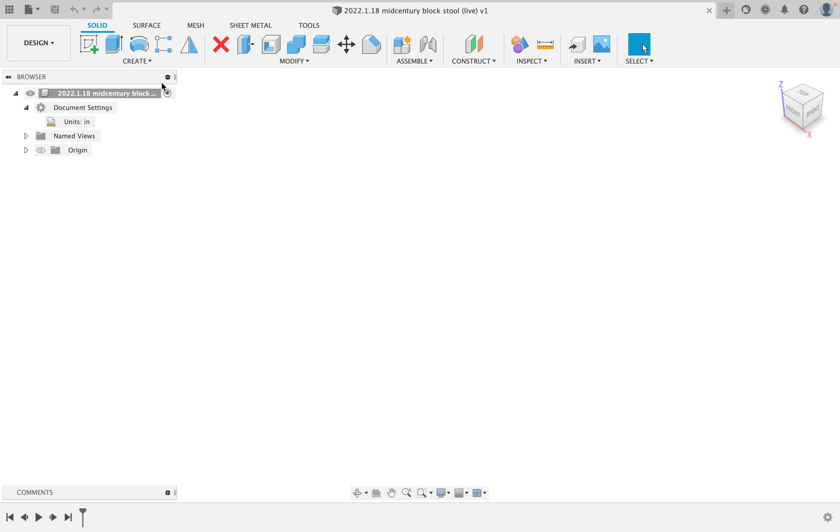Now we're going to click on this button here for Create New Sketch, and I'm going to create that sketch looking forward at the object, because in the case of this stool, it makes more sense to do it that way.

Now I'm going to create a line down through the middle, because that is going to be our mirror line. I will click on it and hit X to make it a guide, and click on this button to make it coincident with the origin. That means it will now turn black, so it knows that it is right there in the middle and I can't drag it over.

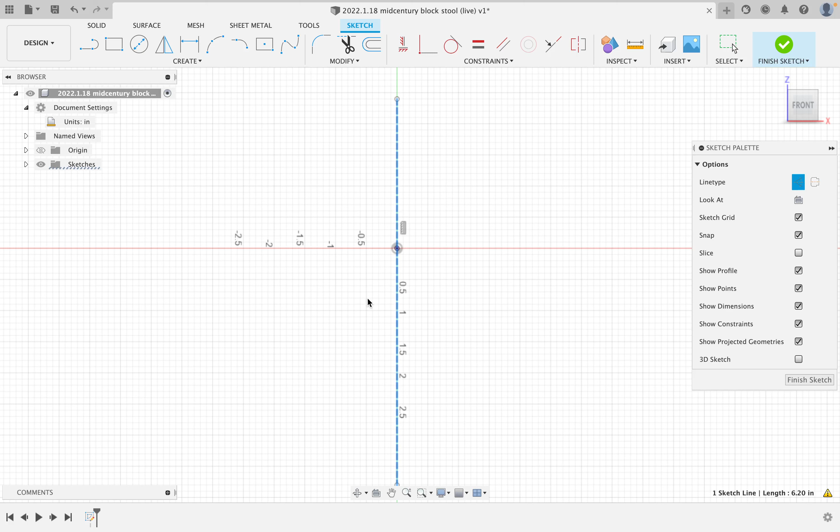I can drag it up and down. It doesn't really matter if we drag it up and down. Okay, so now if I create a center point rectangle and I drag it out, I can tell this the outside dimensions of what we want it to be. So I'm going to make the base here. We're only making the base for the moment.

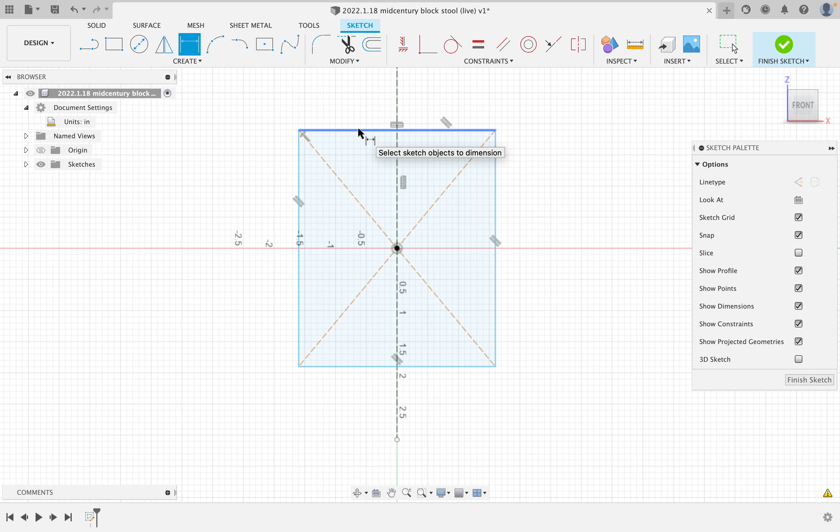And that base is going to be 14 inches wide and 16 inches tall. I will double click on that and make that a guideline as well. Now that we have that boundary, I can drag these ends of this line out, and once they lock in, they're there. So we have a boundary with a mirror line down the center.

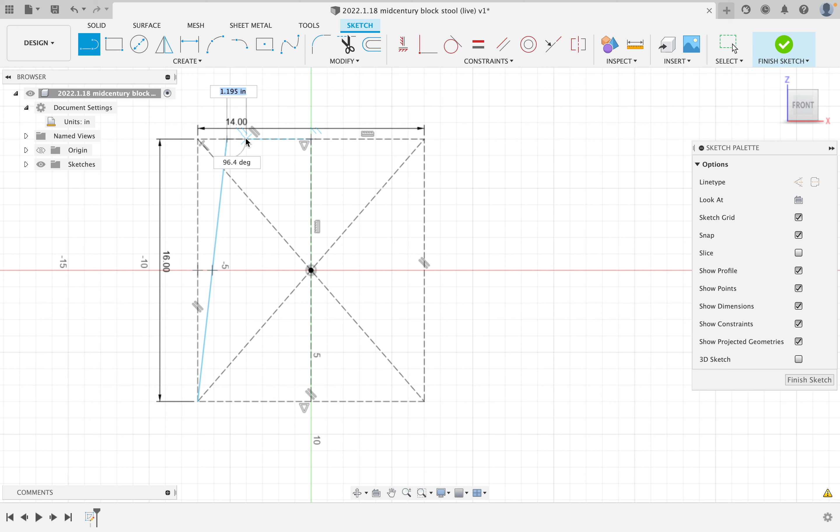So now all I have to do is draw the other pieces. If I draw in from one side, across the top, down, over, down again, over, down, and over, I have created a little shape here that is half the base that I'm going to build. We'll talk about joinery in a minute, because we're going to do the joinery as a half lap.

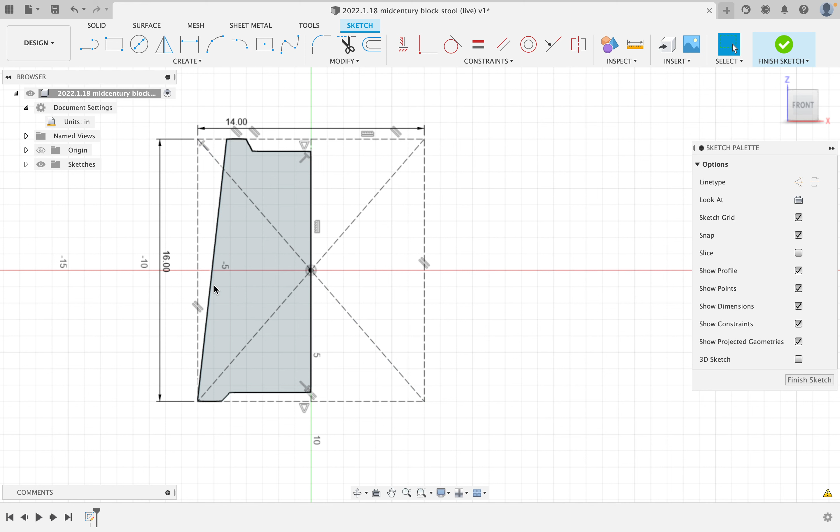But first, let's get some measurements in here. Okay, so this little foot on the left-hand side, we're going to make that 1 3/8 inches wide. This piece at the top, we're going to make also 1 3/8. We can always change these dimensions after.

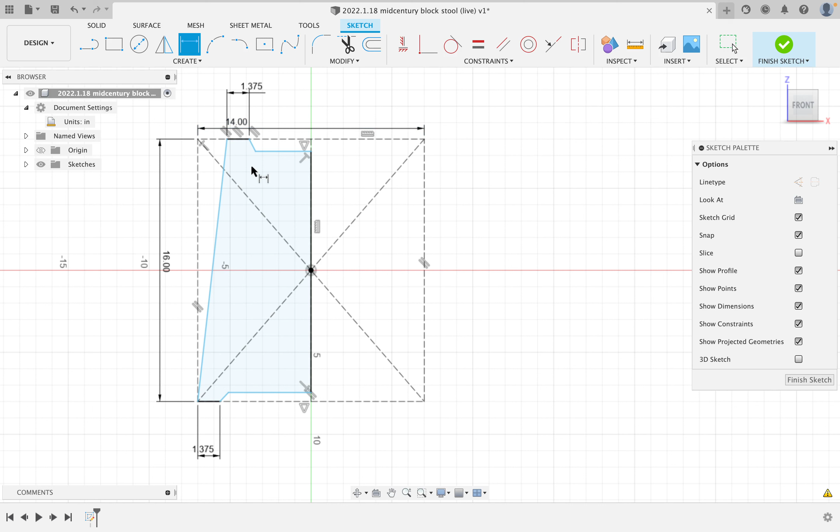To make this angle, I could measure the angle, or I could just tell it, as woodworkers tend to do, exactly how far in we want it to bend from the top. I'm going to call it 2 1/8 in. That's going to give me an angle here. If you want to see what the angle is, you can hit I or click on this little measuring tool here. And if I click one line, then the other line, it will tell me that is 7.6 degrees.

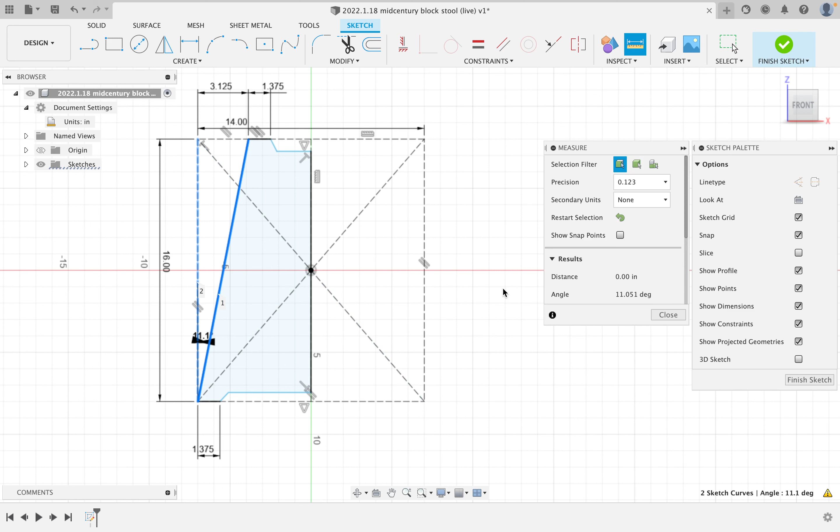If I wanted to change this, I could change it from being 2 1/8 to 3 1/8. And now I can go back and hit inspect and go between these two, and it will now tell me it is 11.051 degrees, just over 11 degrees. I'm going to leave that there for the moment.

Now, I can see that I have defined where this line is and the two short feet. The only thing I need to do now is tell it what to do with these angled indents. So again, I will go to Dimension, I will go in here and I will tell it how far I want these pieces to go in, from here to here.

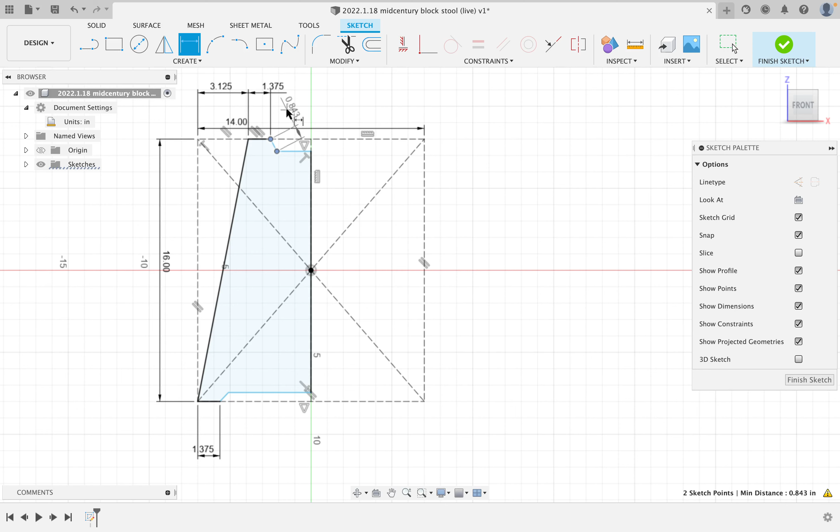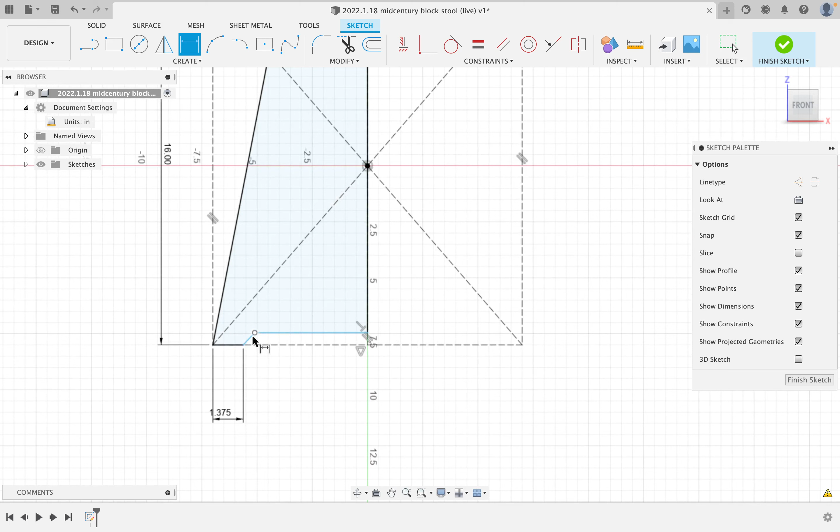Yes, sorry, from here to here, they're a bit small. What I'm going to do is tell it that this is 120 degrees. I'll go down to the bottom and do the same thing. Because I want these two to mirror, I'll go back up to the top and click on the 120 degrees to make them equal. So if I change it, I already know what that's going to be. Now, if that is going to be 120 degrees,

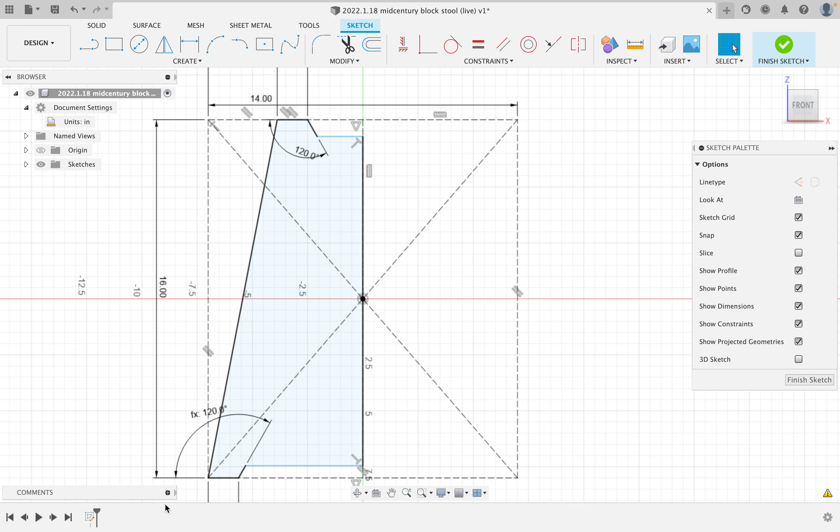it's going to conflict with this angle visually. So what we're going to do is change this to make it parallel with this line here, and they will now both have the same angle. I can copy that angle, and instead of using 120 here at the top, the 120 at the top is

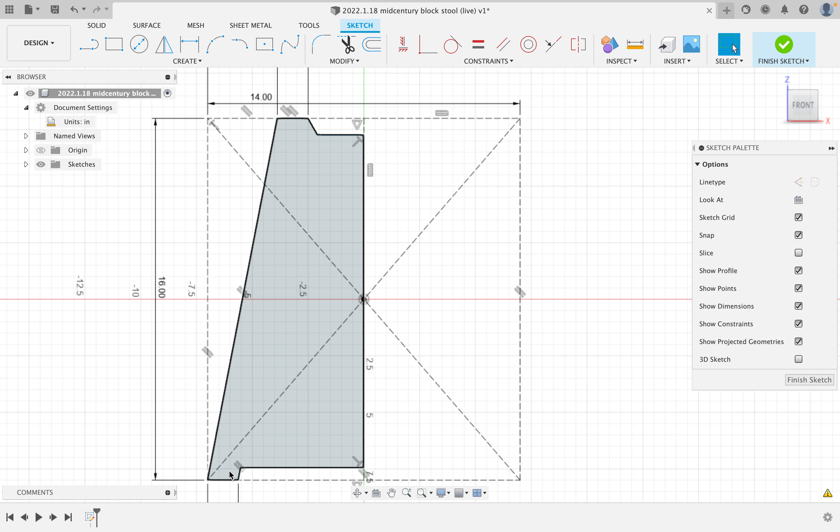probably okay because it doesn't really make any difference. But if I set these two angles, it's going to tell me it is 101.1, but that it is a driven dimension—it's going to calculate it for me. But if I go up here and click on these two lines, I can copy this dimension and hit OK. And now they will both be the same.

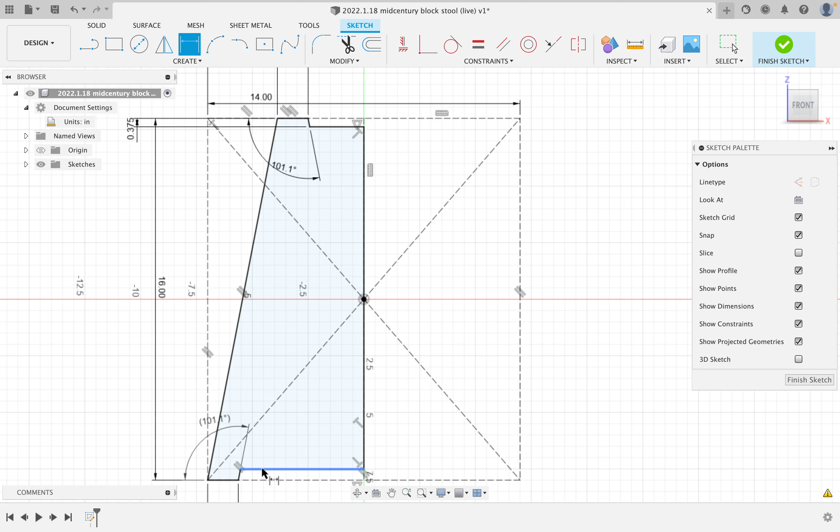So the only other thing I have to do is tell it how far up this little indent is going to be and how far down this one is going to be. So between those two lines, that distance is going to be 3/8 of an inch, and on the bottom we're going to make it 7/8 of an inch up. Now I think that's a little small, so I'm going to change that to 2 3/8 on the bottom.

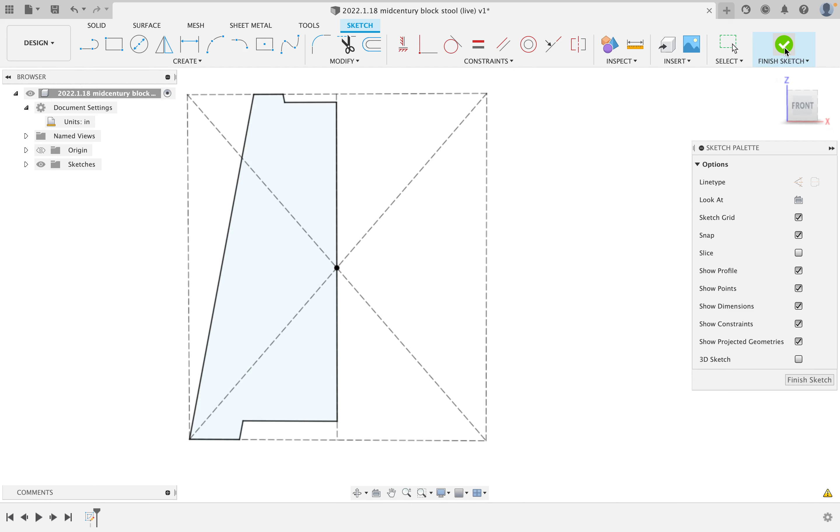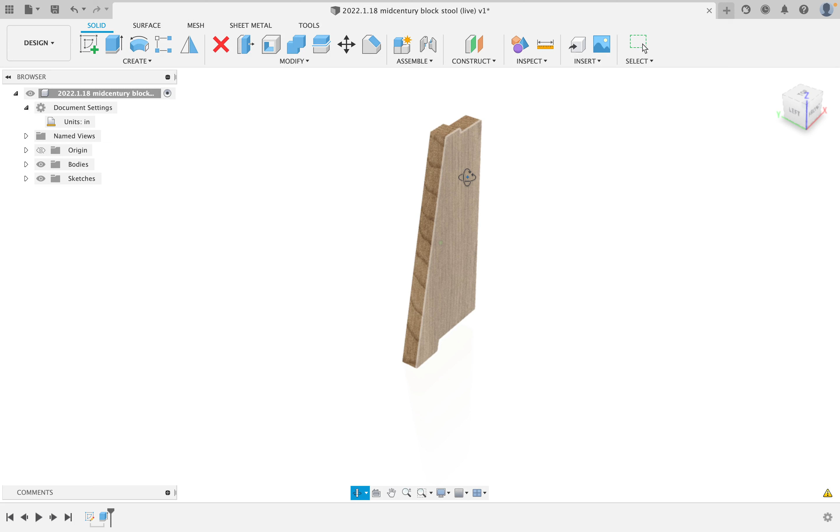And we now have half our base. If I say Finish Sketch, and rotate back around to see it, I can click on the Extrude tool, change this to be symmetric, and make that distance 5/8, which will give us 1 1/4 as a thickness for that base. For the moment, that is what we need to model.

Now we're going to be attaching these together with half laps. We're going to have two pieces that look like this, and a base on top, and we're going to attach the top using 4 dowels. So at the moment, I think what we're going to do is model the 4 dowels, because we can just model 1 dowel and it will be enough.

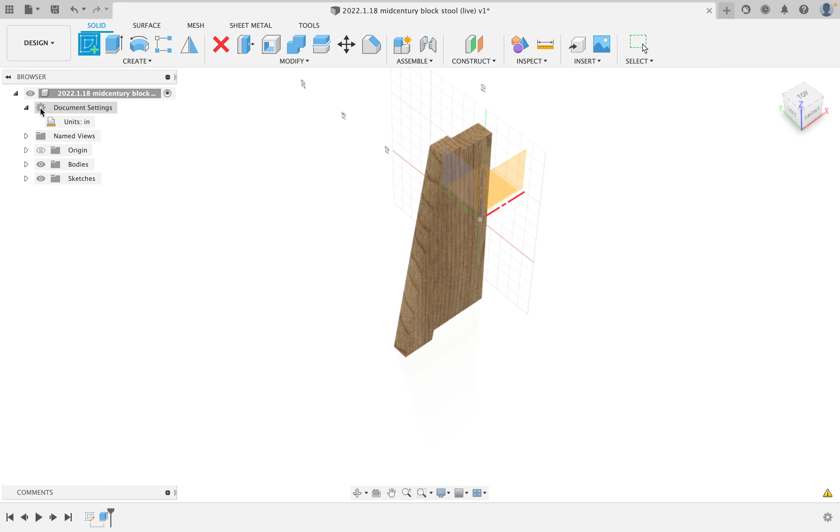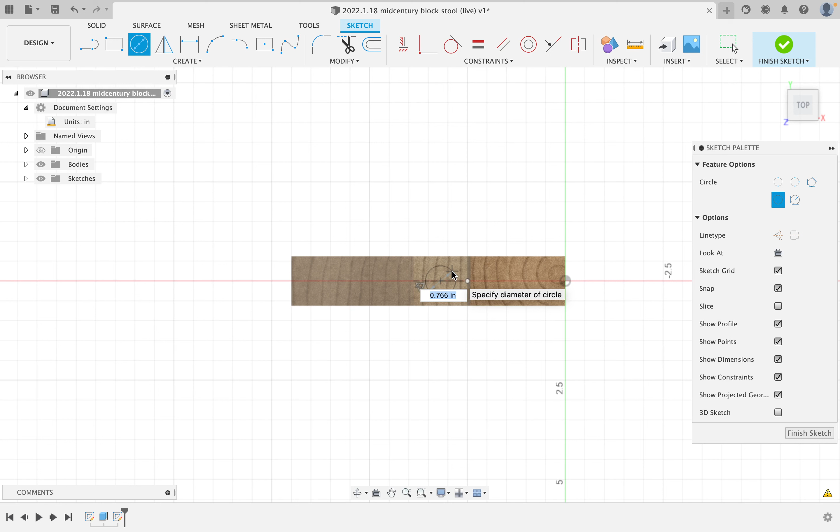So I'll say New Sketch, and click on the top face here. I'll scroll in and draw a little line from one end of the top face to the other. Click on it and hit X to turn it into a guide line. I'll draw a little circle, find the midpoint so that triangle pops up, and draw a circle. I'll hit Dimension and tell it how big the circle is going to be.

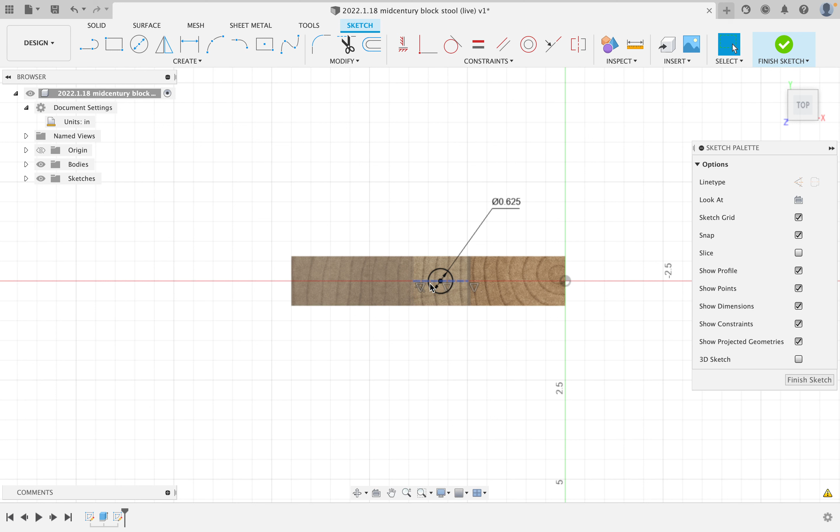It's going to be a 5/8 inch dowel, and it is right there. So why is it not stopping? Because the line—I didn't quite get it on the midpoint. And now you can see that it is right through both midpoints, and that this is in the center, so it is fully defined and black. Fully defined means it knows exactly where it is in space.

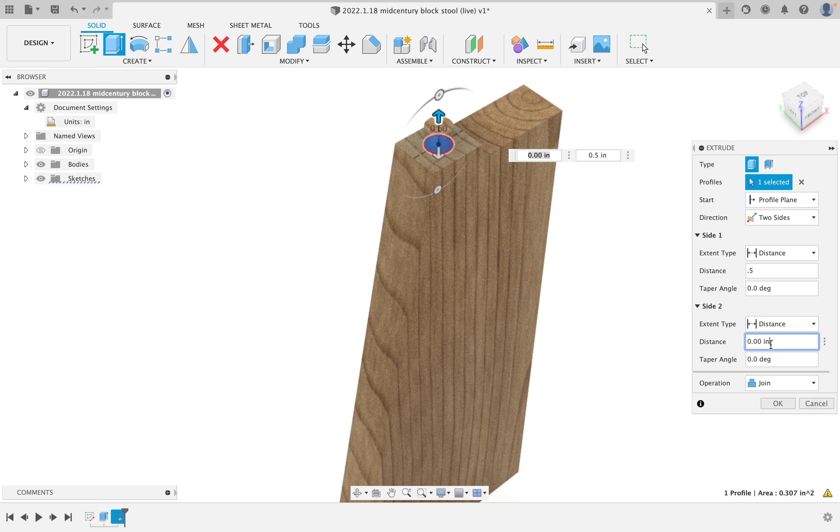So I'm going to go back here and click Extrude, click on the circle, and I'll say that it is going to go in 2 different directions—2 sides. In the up direction, it will go 1/2 inch. In the bottom direction, it will go 3 inches. So it is a 3.5 inch dowel.

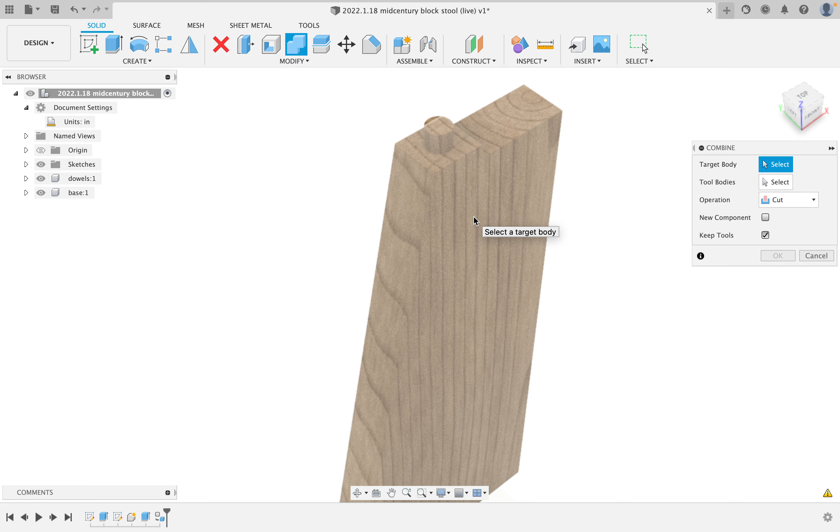We will say New Component. We're going to open up the Bodies folder here and again create a component from this one. So the first component is the dowels, and the second component is the base. And now what we'll do is combine these—modify combine—and I'll cut the base with the dowel and keep the tools, because the dowel is the tool.

When I hit OK, I can turn off the dowel, and I can see that I have made a hole in the base that is exactly the right size for the dowel and the right shape. So we have half a base.

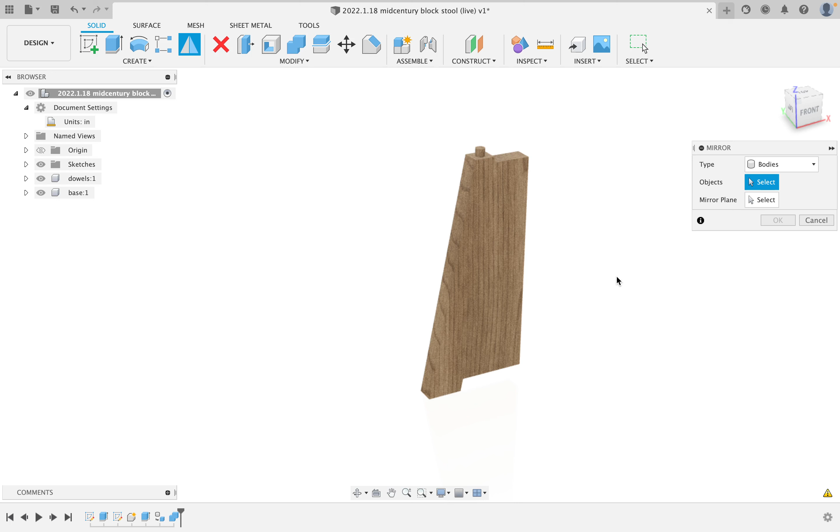Let's click the mirror tool. Make sure we select bodies. Select the body, click on the plane, and duplicate it across the center, and it will join, which is OK.

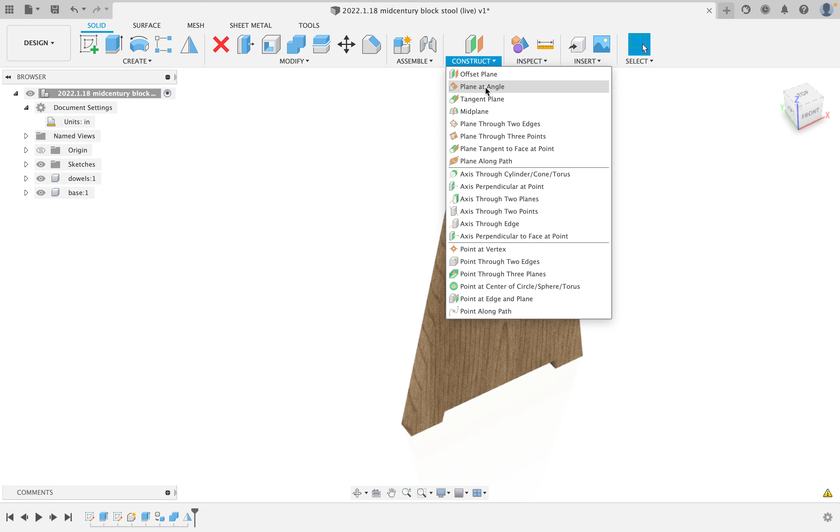Now we're going to want to flip this around. We want to turn it 90 degrees, and because we're going to use the mirroring tool, what I want to do is create a new plane at an angle. I want this angle to be 45 degrees, because when you mirror at 45 degrees, the 45 and 45 together make you 90 degrees. So I'll click on this vertical axis here, and drag this over to be 45 degrees.

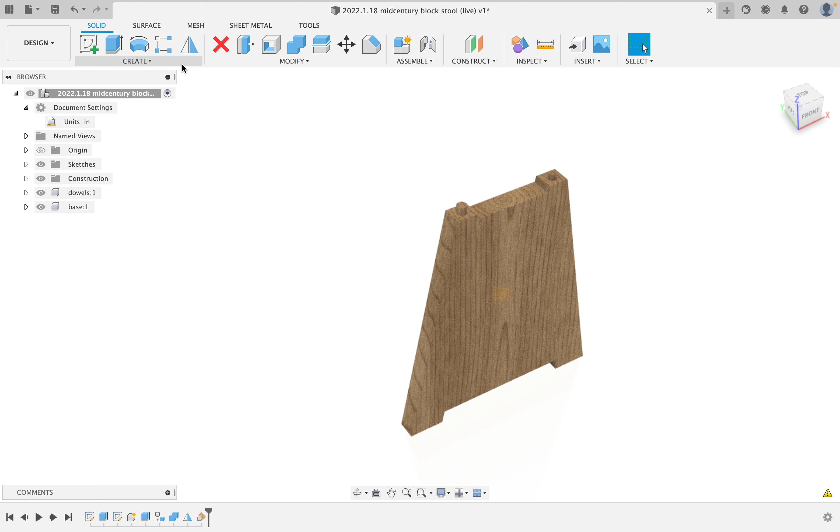And hit OK. You can see that little yellow plane that we have there. Now if I hit mirror and click on my body, then select mirror plane, I'll have to turn the base off so I can see this little plane in here, and I'll pick it. So I can now turn the base back on, but instead of join, I want them to be two separate bodies, because a body is like a piece of wood.

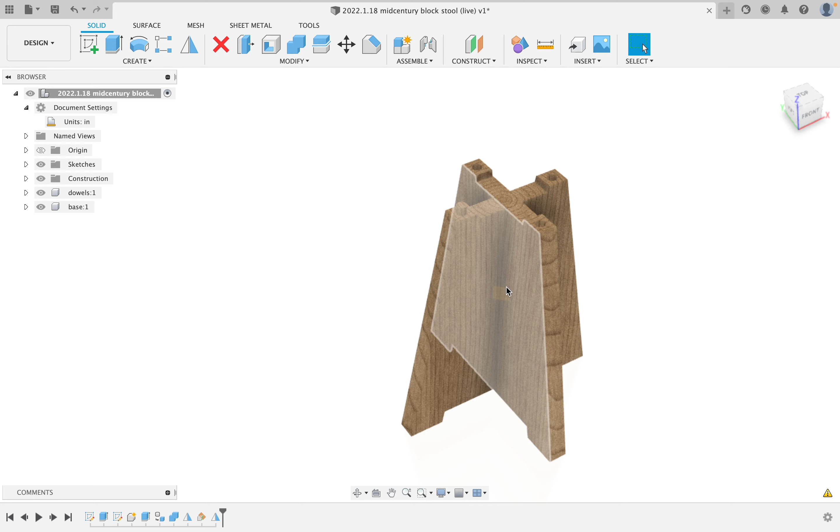When you have multiple pieces, you can have them collected into a component, but now we have two bodies, and we have one dowel. We only have one, but we have 4 dowel holes. So let's duplicate our dowel. I'll show you a different way of doing it.

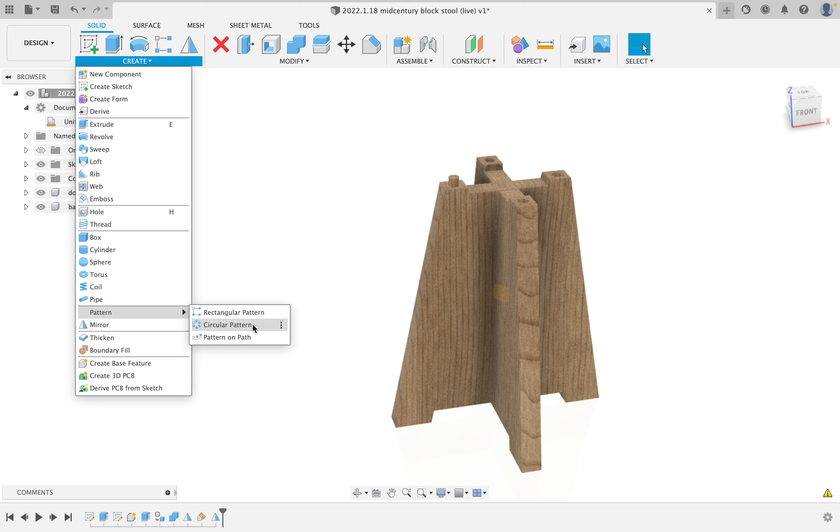When I say create pattern, circular pattern, I can say bodies, copy this object, and rotate it around the center axis. It tells me I've got 3 of them. If I change it to 4, now I get 4 equally spaced around the center, and that is why we model around the center as much as possible. And I now have 4 dowels.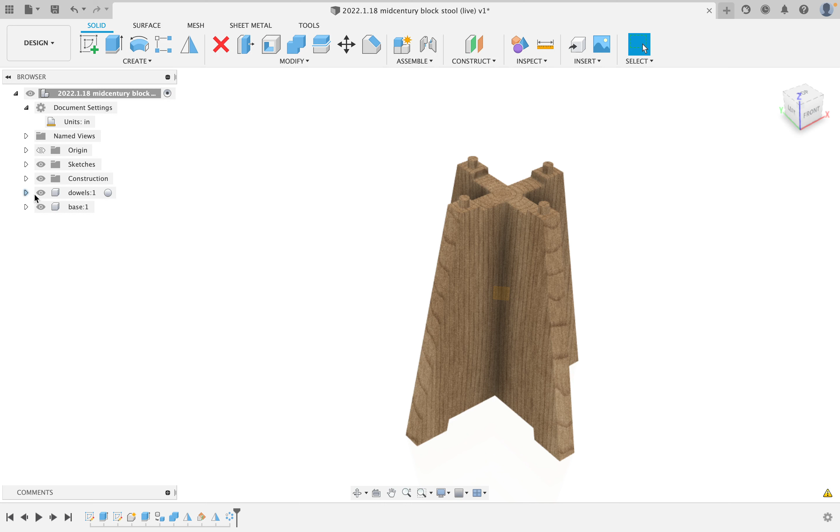Okay, so if I turn the dowels off, I can see the 4 holes, and I don't have to make any more holes there. The only thing we want to do now with this base that we haven't already done is create the half lap joinery.

Now, the interesting part about the half lap joinery is that what we need to do is split both bodies right down the center. They're going to slide into each other. There are other ways that you could attach these together, but I think this is going to be the easiest.

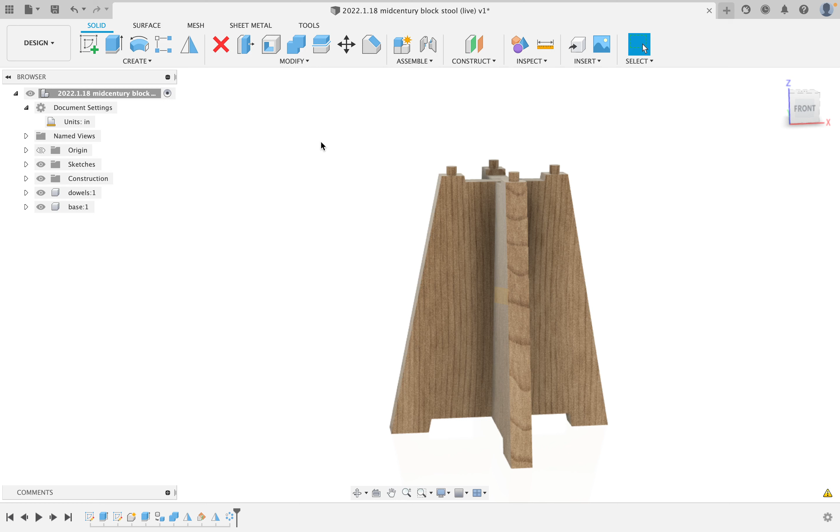So if I say I want to split one body, and I select the splitting tool to be the 2 outside faces of the other one, I'm going to be cutting it into 3 parts, and hit OK. So now I have the right part, the left part, and the middle part.

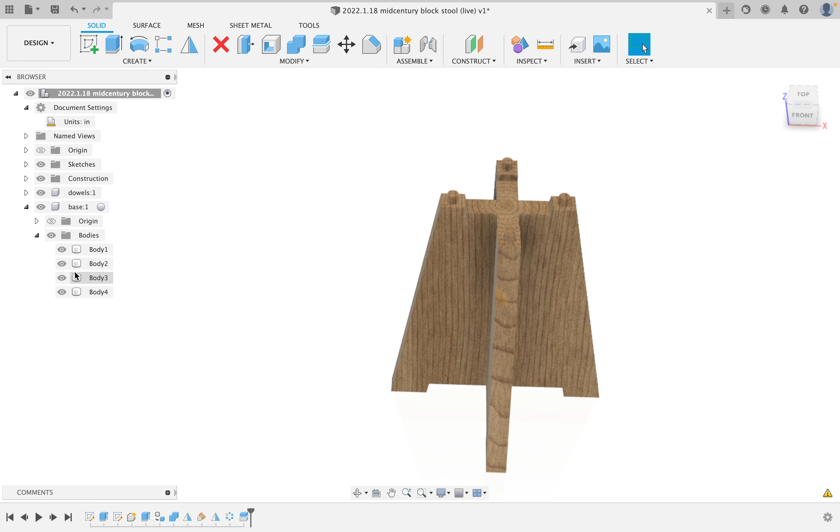I can turn off one of these bodies. There we go. I still see the dowels, which doesn't really matter. But now I could see I have 3 distinct pieces to this one. But that's not enough. I need to cut away either the top or the bottom.

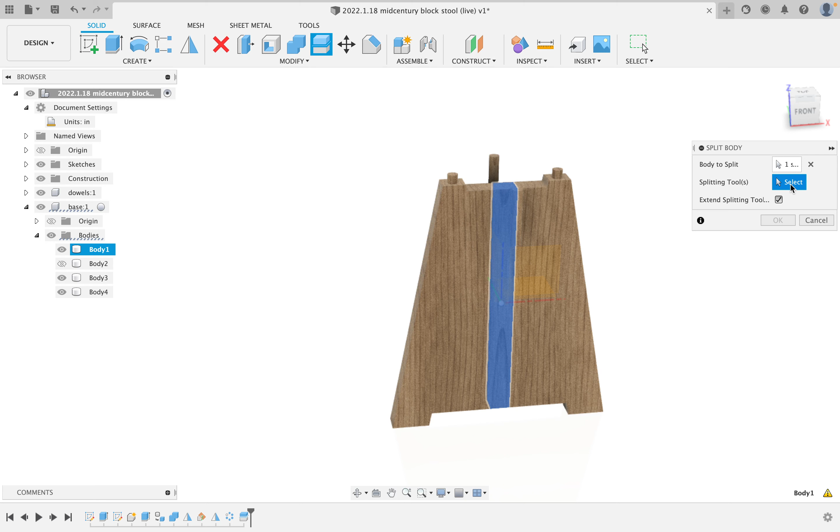So what I will do is I will split the middle section using the flat plane that goes right through the middle, and that will cut it in half. And I will say OK. Now I should be able to pick this top section, which is body 5, and remove it.

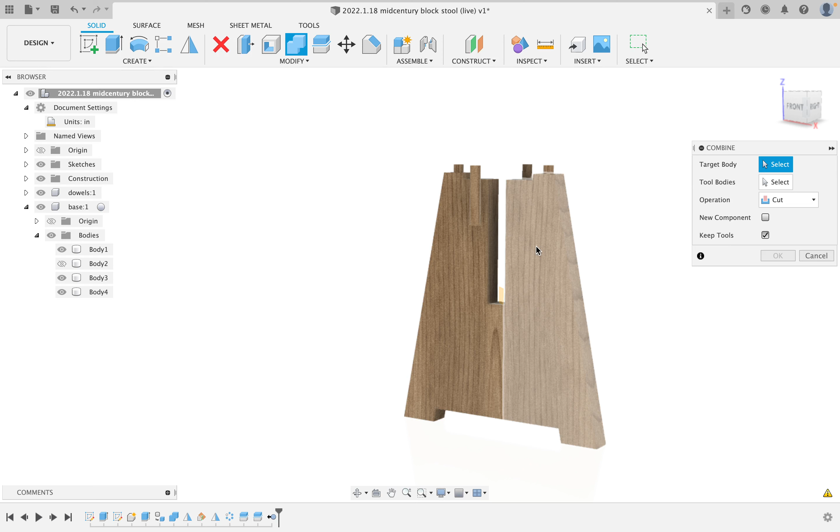Now I go back and I say combine, and I will combine these 3 bodies together to join, and I don't need to keep the tools. And say OK. Now I have the bottom part of the half lap.

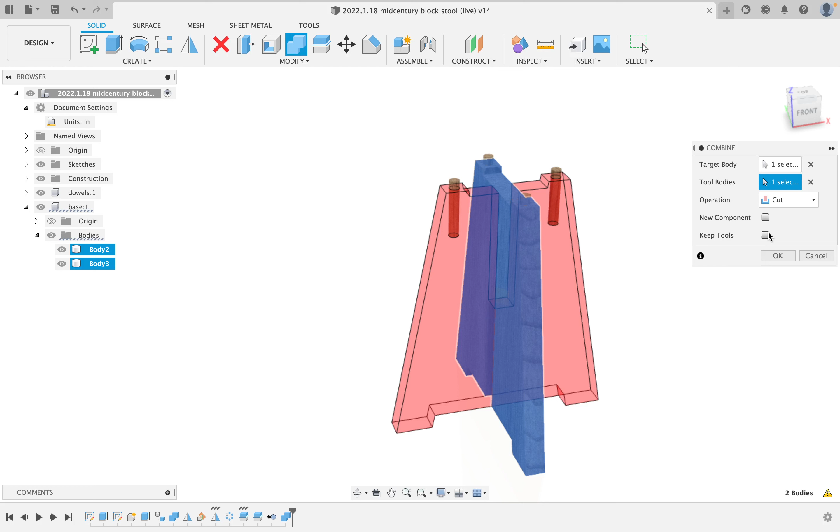I can turn the other body back on, and if I cut the other body with the one that we just cut the piece into, and say keep the tools, I will now have one with a hole in the top and another with a hole in the bottom that exactly mates. And that is the base of our stool.

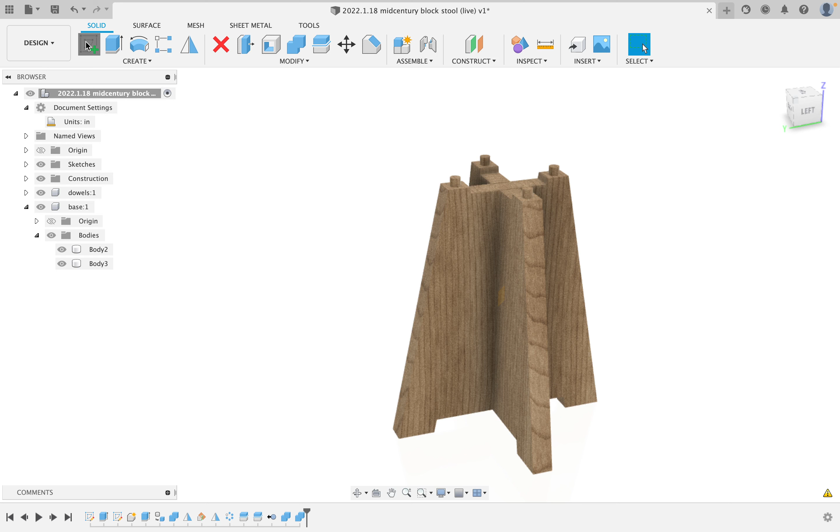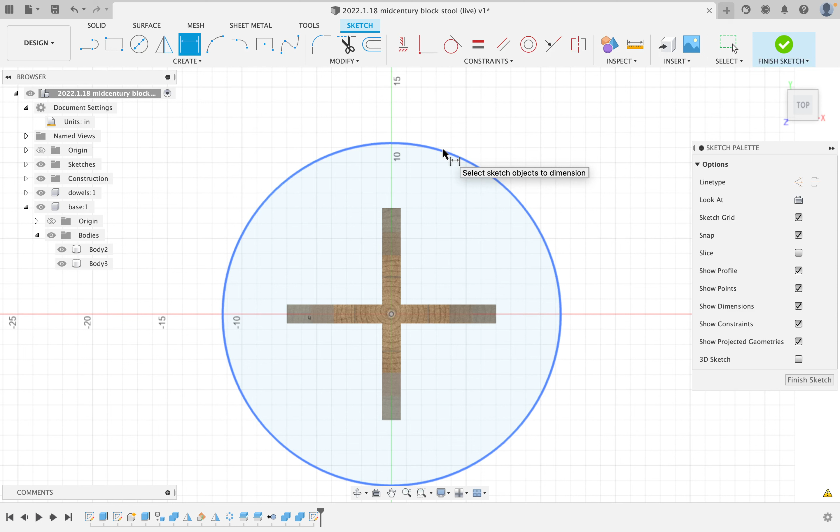Now the only thing we need to do is create the top. So if I click on this new sketch, and I go back to the basic plane, what I want to do is create a round top, starting in the center, just by creating a circle. I click to dimension, and I tell this that it is going to be 17 inches in diameter, and hit Finish Sketch.

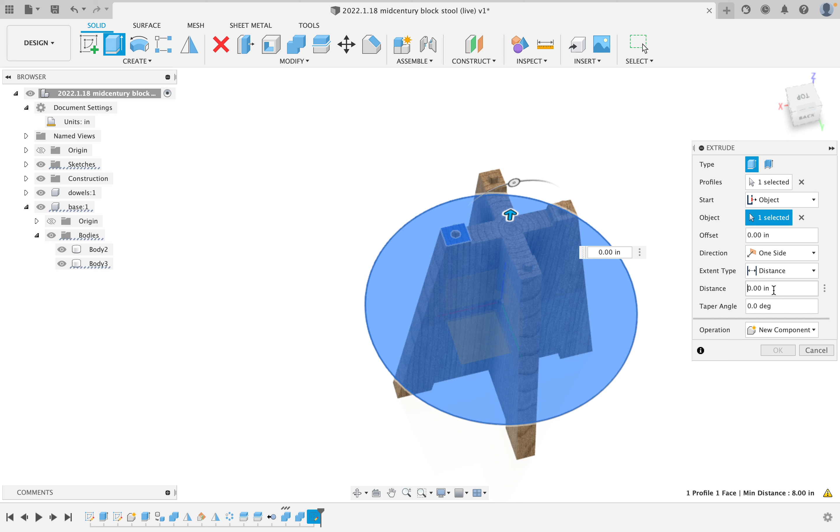If I now hit Extrude and click on this circle, I can tell it to start, not from the profile plane, but from the object, that is, the top face of any of these pieces. I will say New Component, and I will tell it exactly how thick I want it to be. I want it to be 1 3/8 inches thick, and hit OK. And we now have our stool.

The only thing that I'm going to do with this now is I will create a few nice little chamfer details on it. If I hit chamfer and click on the top and side of this, what I will do is, actually no, I'm going to chamfer the top and side differently.

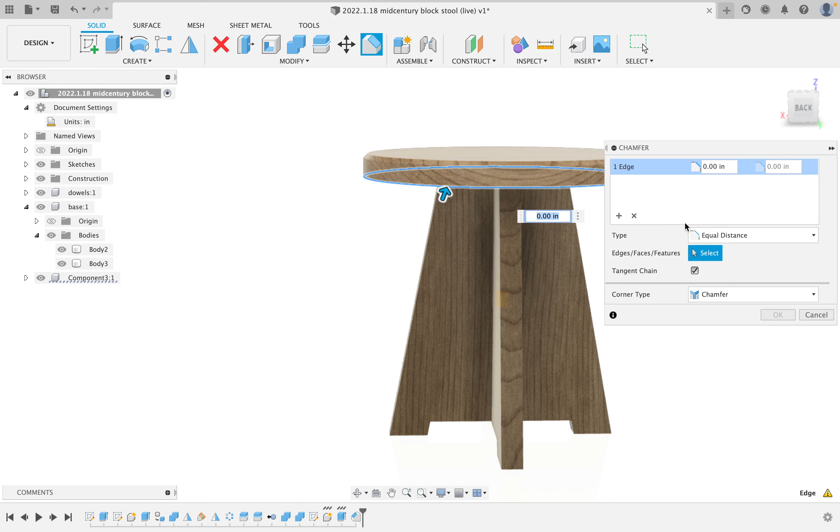In true mid-century style, I will chamfer the top at 1/4 inch in both directions, and I will chamfer the bottom, instead of equal distances, I will chamfer it at 1/4 inch by 1 inch. 1 inch? Oh, I'm going in the wrong direction. 1 inch by 1/4 inch.

There we go. We'll actually make this 3 inches by 1/4 inch. That's why it wouldn't take it when I typed 3 in before.

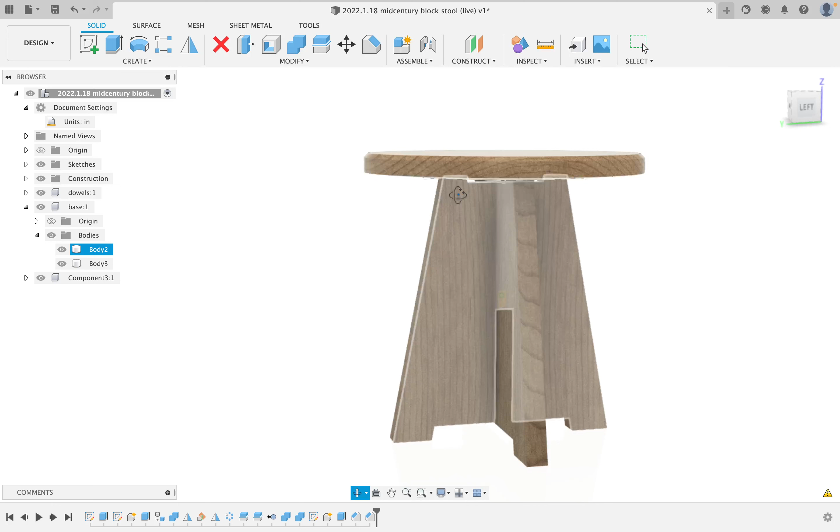That will make the top feel like it is floating considerably much more above the base, because it'll give us some height. I don't actually like the look of that chamfer on the top, so I'm going to go back. I don't have to undo everything, I can just right-click on the chamfer on the top and get rid of it. The bottom one doesn't seem like it works either, so we'll get rid of that as well.

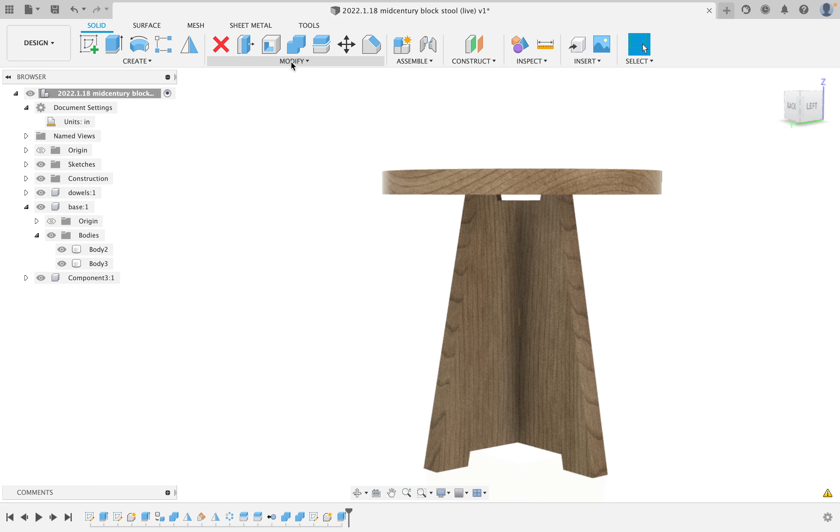This is how we model: trial and error. We see what we like, we see what we don't, and I will add a fillet on the top and the bottom. We will give it a 1/4 inch round over and hit OK, and that looks so much nicer.

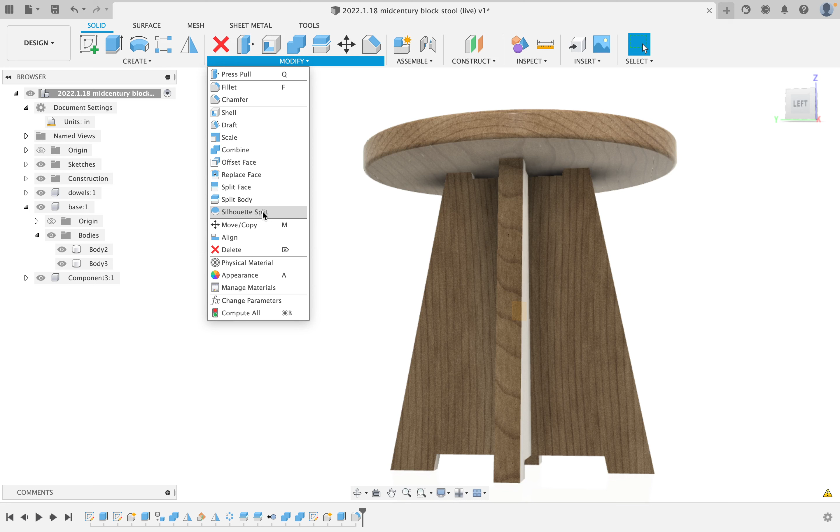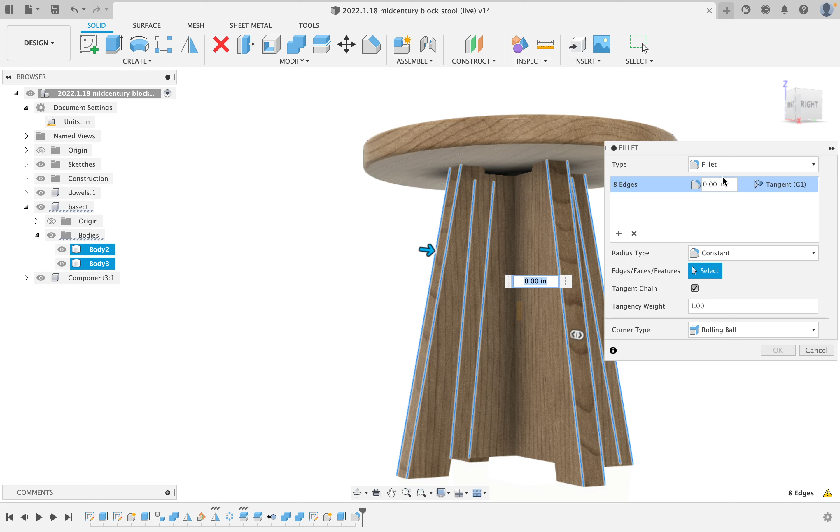What I think we're going to do is match that on the bottom. So I'll go in here again. I could have done this before duplicating, or I can do it now after. I will select the two edges of each one of these pieces - if you select the wrong thing, just click on the X - and again give that a 1/4 inch round over and hit OK.

And now those edges are rounded over. Are they rounded over? Yes. Hard to see with the model, but they are indeed rounded over on the edges, I think. That is what it is, right? Yes, rounded over on the edges.

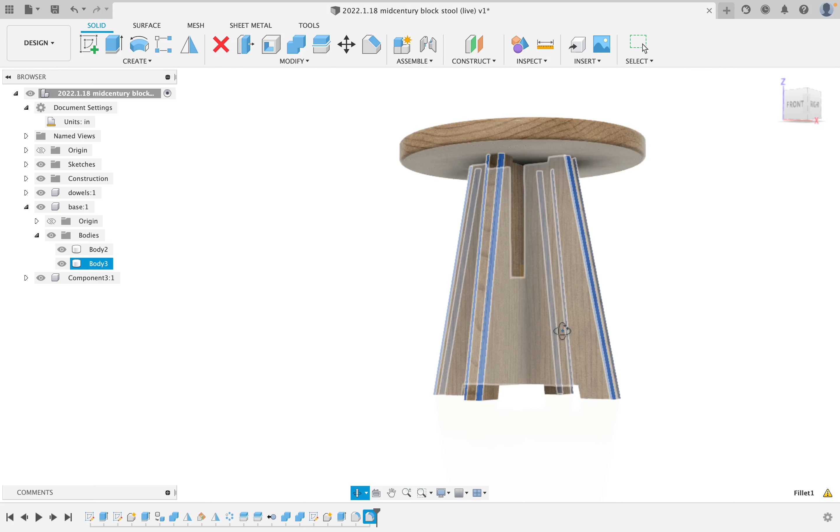Very good. So this is a mid-century piece, so we're probably going to want to go into Appearance, just hit A, and make this actually from walnut. It's that simple. But we're not going to use walnut for our pegs, we're going to use, probably, maple for our pegs. So we'll go in here and change our dowels to maple, and hit OK.

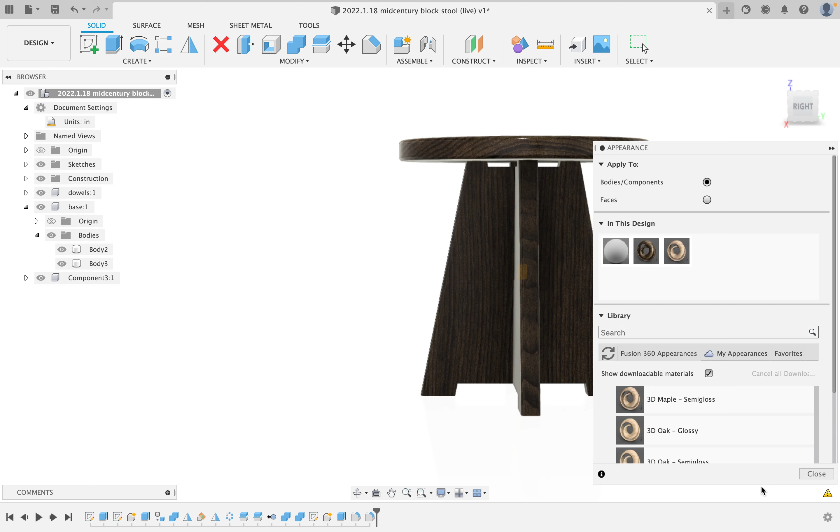I'm just going to rename my component here to top, so we are nice and accurate with everything. If I look up here, we have a nice little stool, and if I turn the top off, you can see those maple dowels, and that's pretty much it. It's a very simple little project. I think it's quite cute.

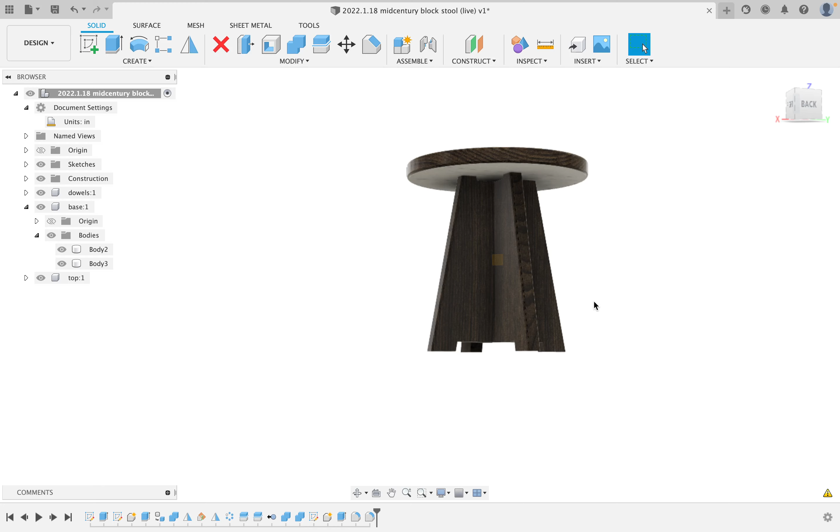I think the angle is a little off maybe from what we were working for, so let's see what we can do to fix that up. I'm going to turn off that plane that we have in the middle, and go back in here - this is the beauty of parametric modeling. I can go back and change any of these things that I want later.

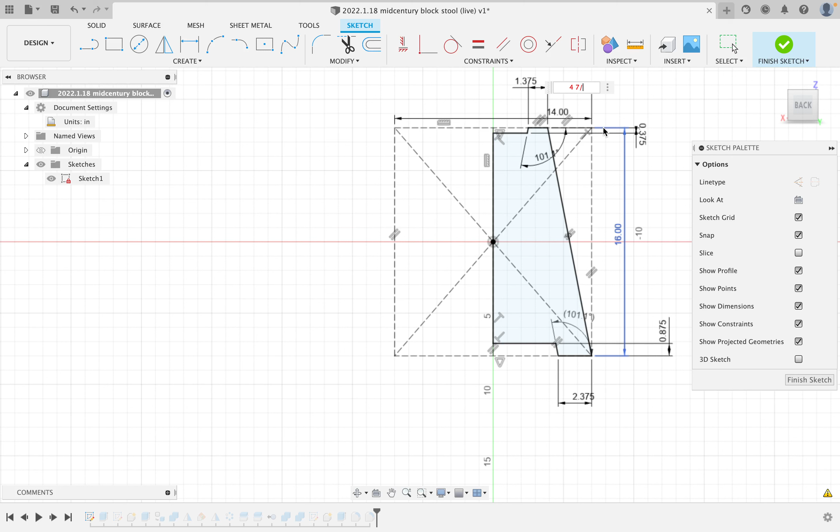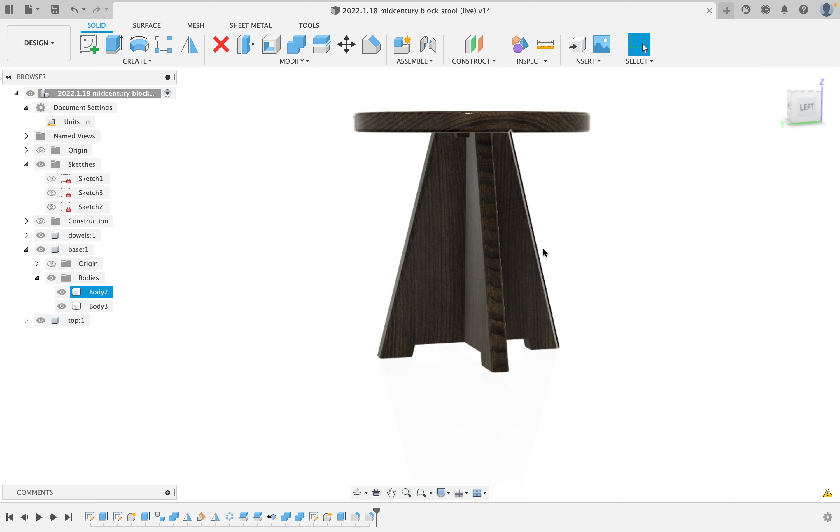So I think this angle is a little wrong. I want it to be a much narrower base at the top, so I'm going to call this 4 7/8 and hit Finish Sketch. Now we have a much steeper angle, and that base is now a little too far toward the middle. So I'll go back and change the same thing again to 4 1/8. I really need to learn how to type in imperial measurements, it seems, and I think that looks dramatically better.

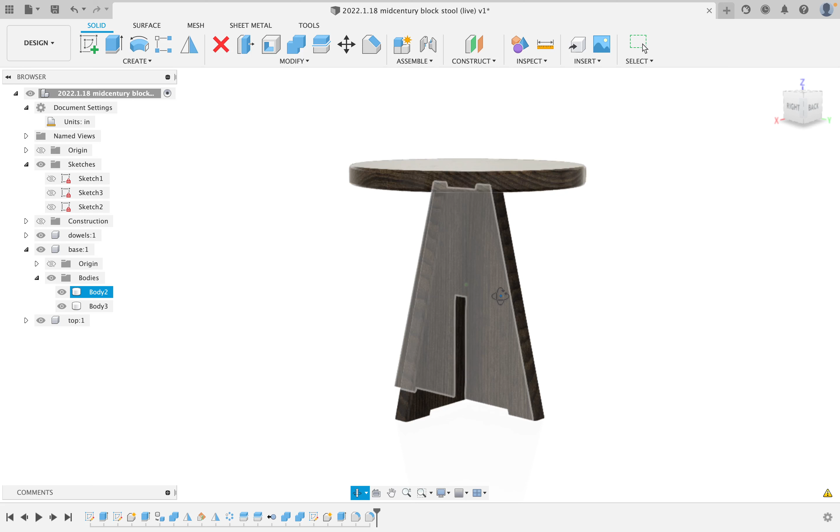We now have a nice little stool. I think the feet are a little high off the bottom, so I will hit Finish Sketch, and again, I think this sort of shows off that mid-century aesthetic. Will it be the most comfortable stool? Well, maybe not. But when you have a little stool like this, I think it will definitely set off the other things around. If you have a few of these, they're great little decorations.

Anyway, I hope that has been informative and helped you today to learn something about the modeling that we're doing here. We're going to go back to something a little more traditional - we're going to be doing some angled cuts and dovetails on a splined stand and a splined table in our next classes. So please feel free to come back and join us.